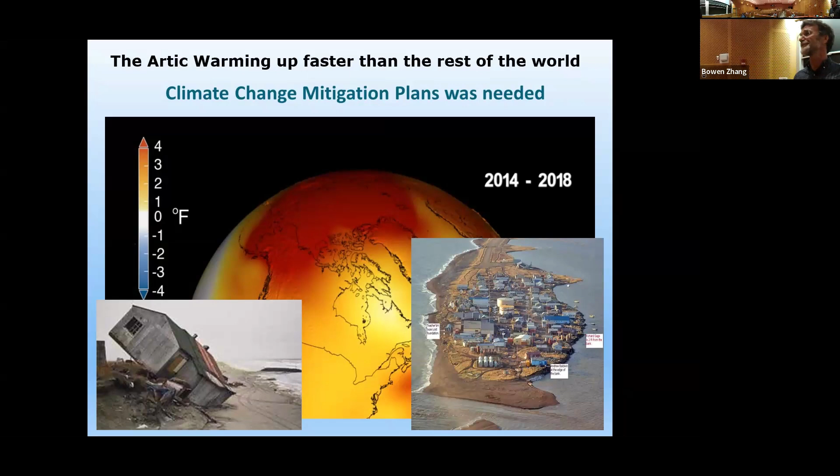So what do we do? Well, in 2008 we all came together in a big meeting, brought in all the leaders, and decided to go for an energy plan that is now in its 16th year, which we keep updating as we transition to new technologies. We are on track for about a 10% decrease by 2025. We're hoping for 25% by 2030, and 50%, hopefully, by 2050.

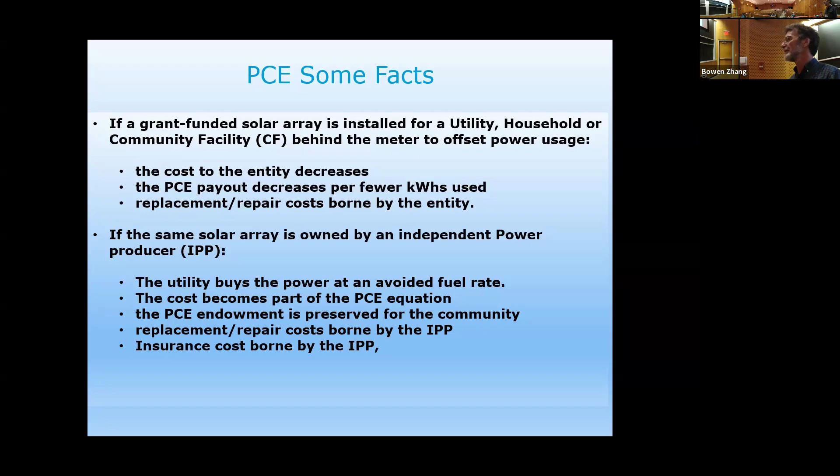So we're transiting, taking away the actual producing systems away from the utility, giving it to the tribes or other entities that then will operate them separate from the utility, and the utility themselves are becoming just a transmission entity, selling the power, taking care of the actual grid, where the communities themselves then increase their sovereignty by producing their own energy. This is the formula that's used in Alaska to do that.

And there is basically a limit to a dollar that's becoming a problem. We're going to try to raise it a little bit so that some of the communities can get a little bit more PCE, but it's basically the proceeds from the fund that is distributed.

The cost of residential power in Shungnak in 2022 was 88 cents. And when you divide it up to an IPP, then this little piece here, the 15% difference, is preserved and can be given to the IPP.

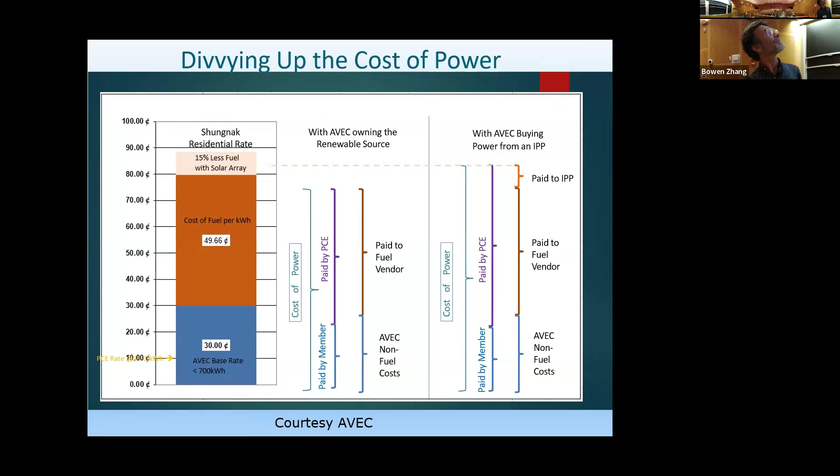And the reason I'm putting this up is that we also want to add heat pumps into the household. We want them to go a little bit higher than the 500, still staying within that 21 to 23 cent per kilowatt hour limit, so that they can get good, low-cost electricity to offset the diesel fuel, which happens to be $18 a gallon.

So because of the PCE formula in Alaska, it's not as easy to do the transition. We actually have to get all the entities to work together to get it to work. If it's just the utility building it, the price for the household stays the same. The only thing that happens is the base rate goes down.

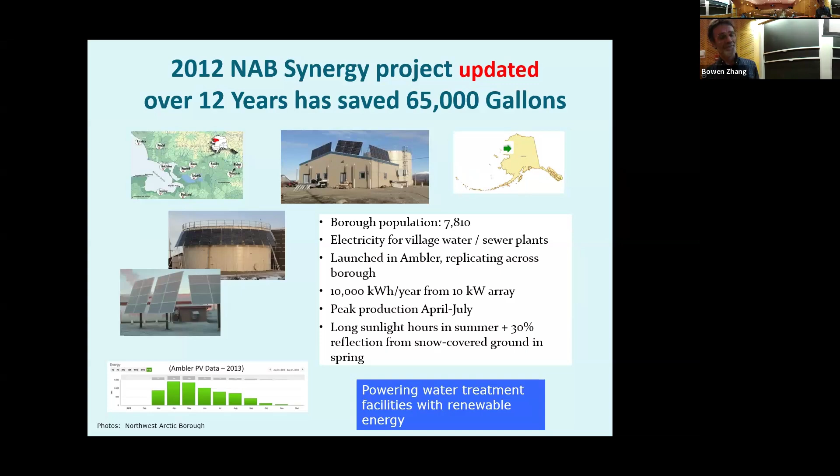A year later, we knew what we had. We had a capacity of about 10 to 11% capacity of solar at that latitude.

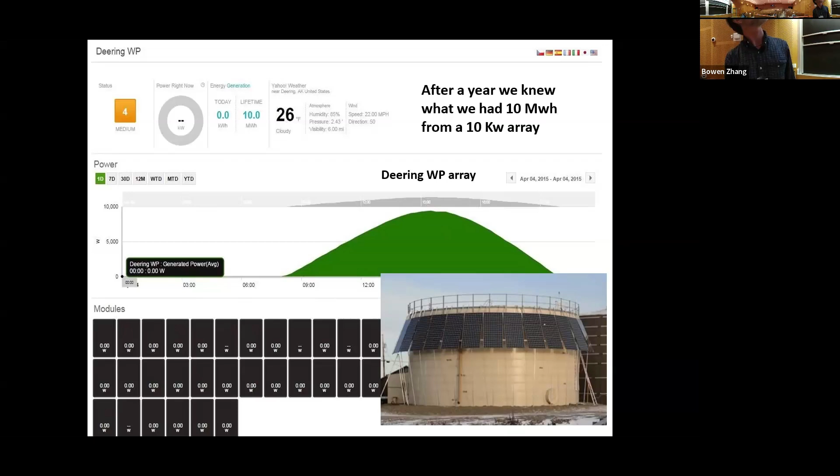So this is the amazing array that we put together at 180 degrees. Up there, the sun doesn't go up and down, it goes around the horizon, right? So you need a different construction of arrays. And then you get a really broad power curve so that you can match the generators much, much better.

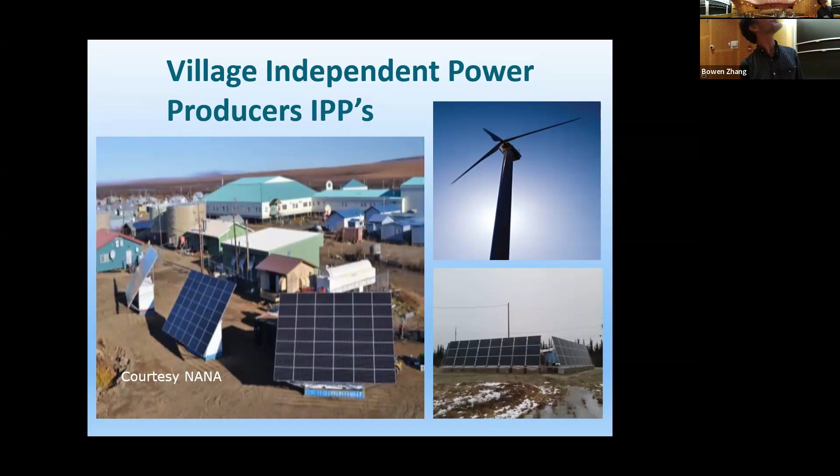In 2021, the Shungnak project came into existence together with a battery. This particular project went around the world. A grant opportunity was created by the USDA High Energy Cost Grant. Two communities, Shungnak and Kobuk, came together with an MOA—they had already tied together with an intertie anyway. And then a power purchase agreement was executed with AVEC, which happens to be the utility. Another MOA was executed with Northwest Arctic Borough, where I'm a manager for the borough.

We also created an investment energy fund for the communities. Funds were dispersed as needed for insurance, maintenance, and eventually for the build out of the array. This was in 2021, now it's 2024. It's been running since then, very nicely.

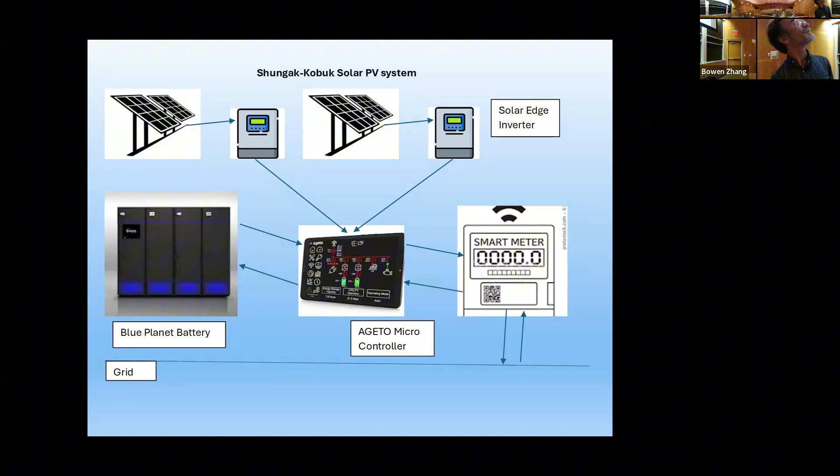Here's a little bit of the layout of it, no big deal: solar arrays and solar inverters, an AGETO microcontroller, a back and forth meter to the utility so we can measure, and a Blue Planet phosphate battery. And it's been running excellent ever since.

Imagine a community that has had diesel power 24/7 since the early 60s. Suddenly, the diesel generators are off. The amazing quiet in that little community when that happened. And they could run straight on the sun for several hours during the day.

It was amazing enough. Here's a couple of power curves just to show how we can work. The yellow ones are where diesels are off. And by exercising the battery 2 or 3 times even during the day, almost to 90 to 100%, we can time shift the solar so that we don't lose it.

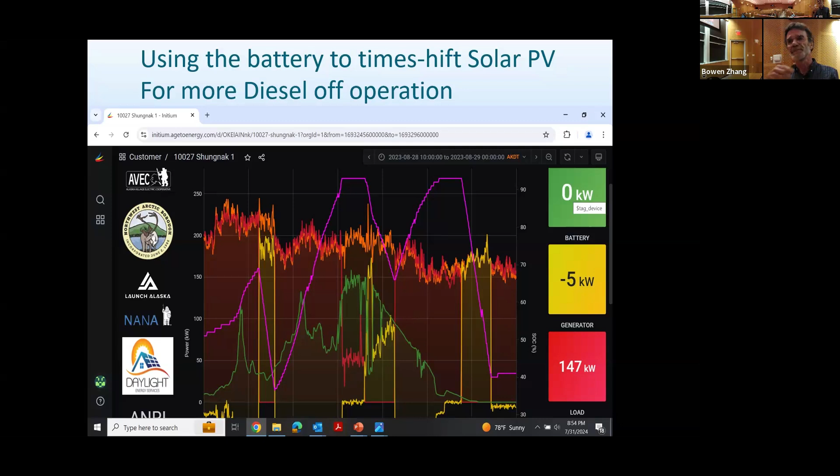There were several different algorithms created over the years to see which is the better way to do this. Here's a power off that was not noticed by the community. You can see the generators went off, the battery took over, kicked back in, and then it continued, and the community didn't even know it happened.

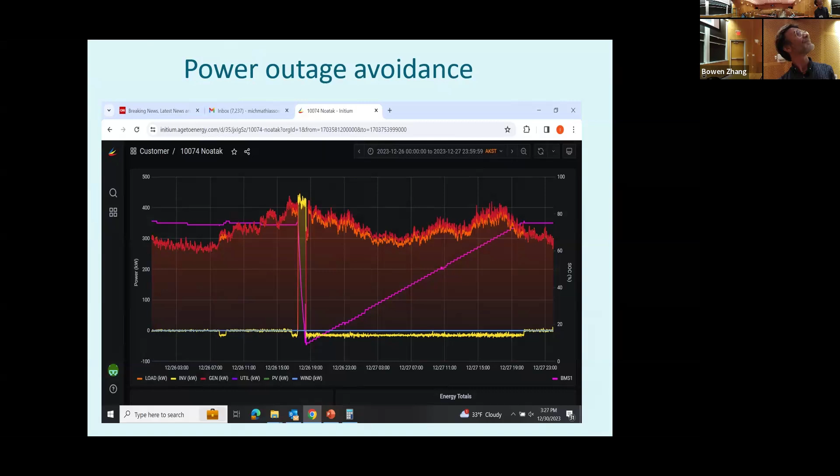The utility operator did. He worked on his generator for an hour.

It got the Sunny Awards in '21. We went down to San Diego and got the Sunny Awards award as the most equitable solar array system community built in the nation. And the amazing thing with this, when we were in San Diego, they said there's a difference between this one and all the other community solar arrays in the nation. They have a battery. No other community arrays in the entire United States had a battery, and we are operating it.

The tribe is running it. We are actually running the utility. We are controlling the utility instead of the other way around. So it's a pretty interesting arrangement. We also got the Project of the Year award in 2020.

So why develop independent power producers? The community is taking control of their energy future, creating buy-in and good relationship with the utility. When we started this, some of the communities wanted to get rid of their utility because they kept turning off the power. They couldn't pay for it.

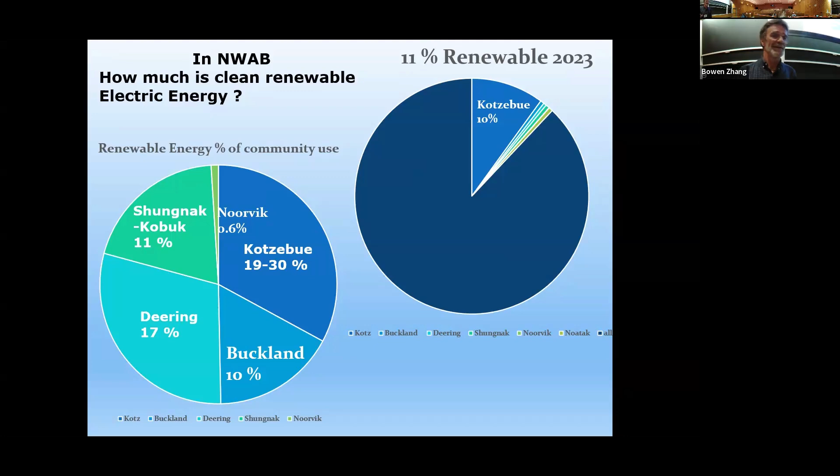So how much is the clean and renewable energy? Well, currently it's at 11%. Shungnak and Kobuk at 11, Deering at 17, Buckland at 10, Kotzebue at 19 to 30. This is of the electricity, not the heating fuel, just electricity. So 11% total for the whole region. Kotzebue itself, which is a pretty big operation, the city is 4,000 people, fairly small compared to the lower 48, but it's the largest city up there.

And we have an OCED request with funding that has been approved, almost $55 million. We're putting in some ourselves for a total project of $68 million to build this out, to maximize the amount of solar that we can do at that latitude.

This is the way it would look when we complete it. About 328,000 gallons saved per year, at a value of about $1.8 million coming into the communities, which would be split over year by year.

And this is only the solar project, not including wind. That will produce about 25% of the electricity for the region, split out between everything. Kotzebue is at 13% at that point.

We should reach about 21 to 25% total for each community as far as it goes. But building solar beyond that, you're going to need a lot more battery, and you'll need to oversize the arrays and time shift more and more, which isn't economically or financially feasible right now. The batteries would have to come down a lot in price to time shift at this latitude to have more solar. Even at the equator, you only have 50%.

So we also decided to do heat pumps. So what's going on here? Anyone? Two minutes. What's happening here?

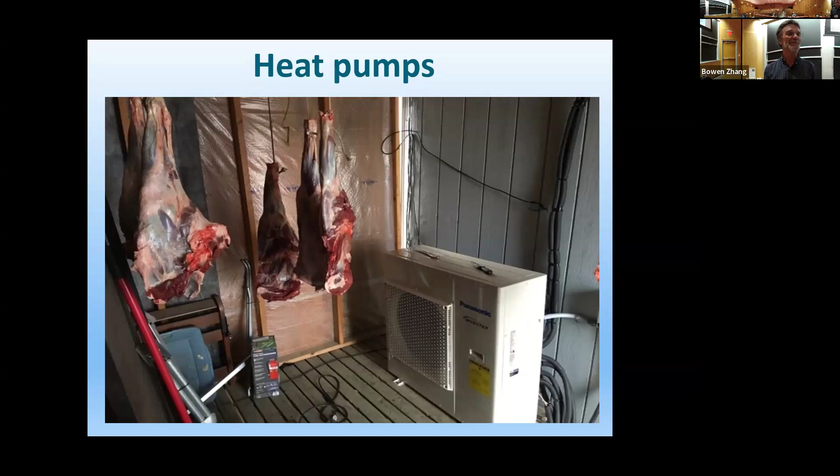When we put that story out with Panasonic, it went around the world. They really liked that. So of course, Alaska and Maine have the same problem with diesel fuel, and harvest season for heat pumps is the same as for solar PV.

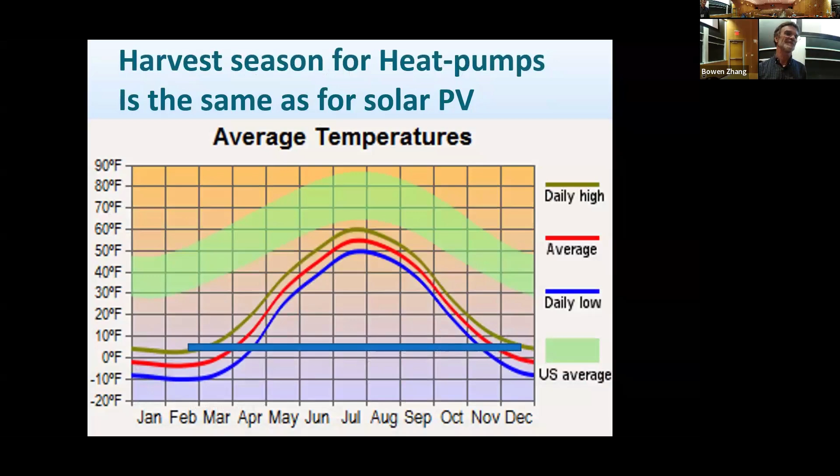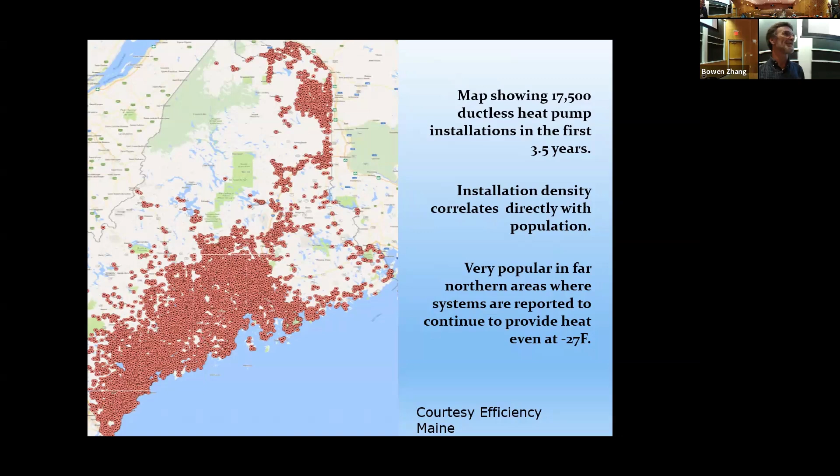Courtesy of Efficiency Maine, which we started looking into a few years back - they have been doing an amazing job with heat pumps. This is quite a while ago now, but from the East Coast, people are adopting heat pumps across the nation.

So 750 kilowatt hour PCE is, of course, good. So we're going to do Mitsubishi heat pumps for everyone.

We have an onboard calculator in Ambler that shows the savings per year at a fuel rate of $12, which is now $18 - so this is a little bit off. Saving over 14 years is $35,000 per household up there, which is now a lot higher.

So once we get the solar in place, adding heat pumps in, we're offsetting even more fuel, and then the savings are higher. Here's the COP curves according to our calculator, which is online if everybody wants to try it. It works at different latitudes.

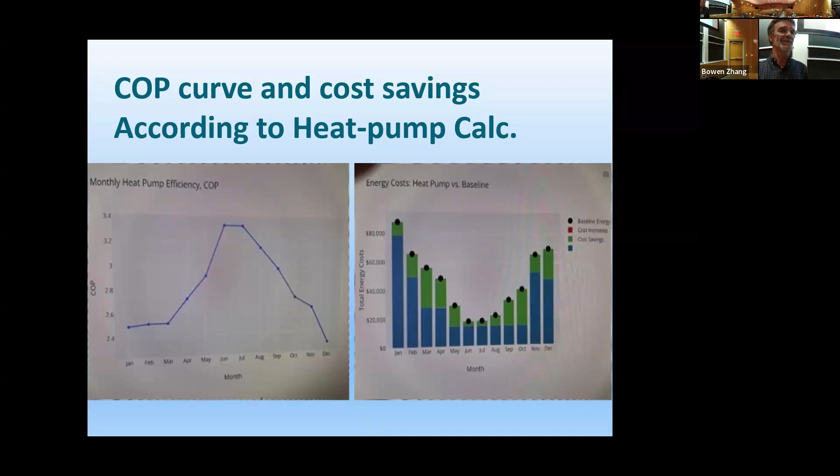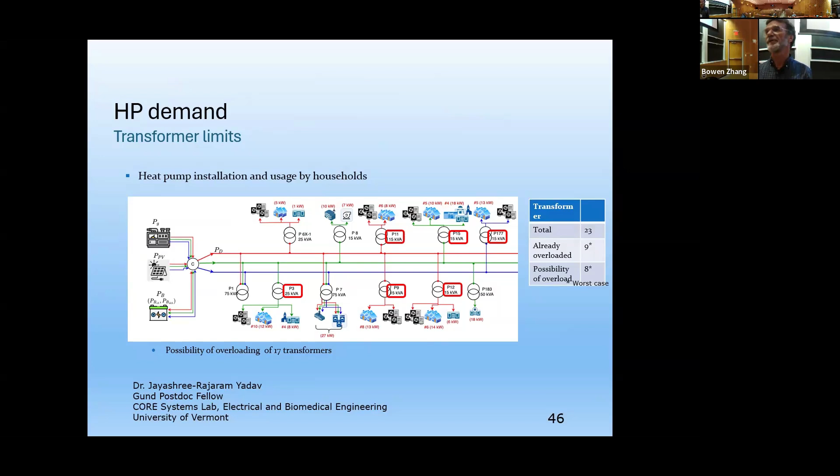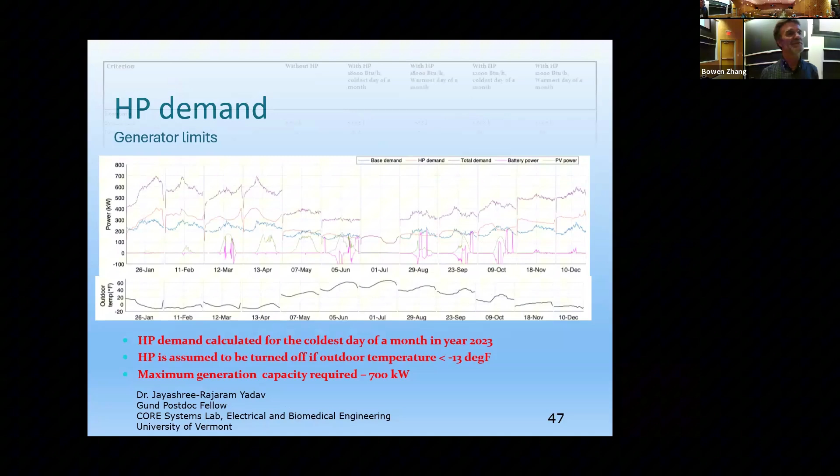We're also modeling the demand on the grid. The small grids are going to have to be upgraded - some of the transformers are marginal for being able to add the heat pumps. We're also figuring out if we can run the generators higher, so the generators also have to go a little higher to be able to modify this whole setup with heat pumps and everything.

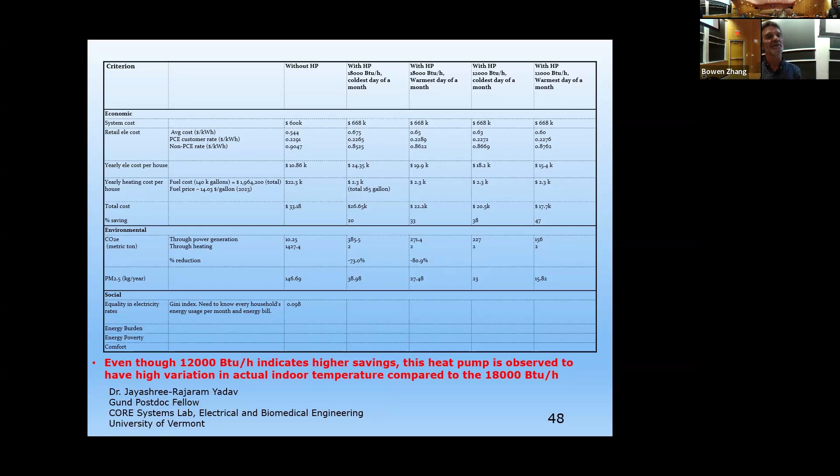And the steering committee keeps going on all the time, every year. So what's needed is a clear vision of the future for the people, by the people. Do we develop energy resources for short-term profits, or develop resources that can sustain the region for the foreseeable future and be clean?

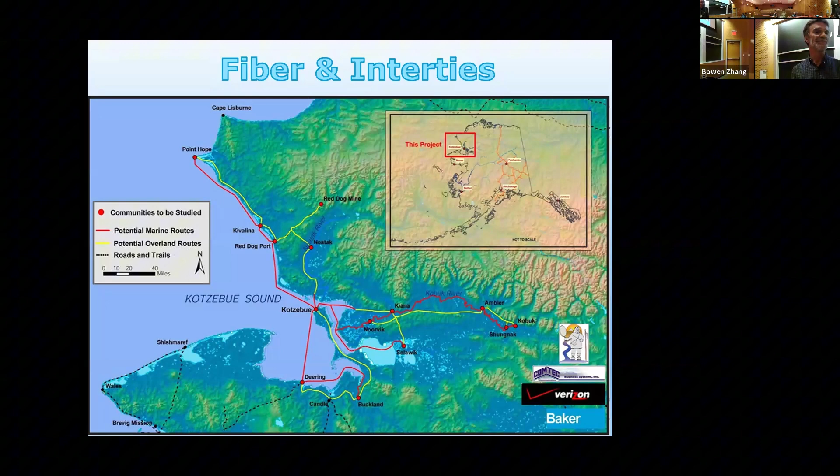Fiber and interties - we're dreaming about these. This is a very hard environment to try to do it in, yet fiber is going to be put in. We're looking at possible DC lines to connect the villages together, and there's also a hydro project. The dreams are important when we go forward, talking to all the communities about what's possible and not possible, keeping them at the forefront when we're discussing where to go - solar, wind earlier, solar, hydro - and trying to get there. I think that's it.

Inspiring. Thank you. Thank you. Quite good.

Thank you very much. Thank you for finishing and showing us what we've done in our small communities. Yeah, thank you - with your guidance, nobody else. Wow, but thank you. Thank you all. Many people.